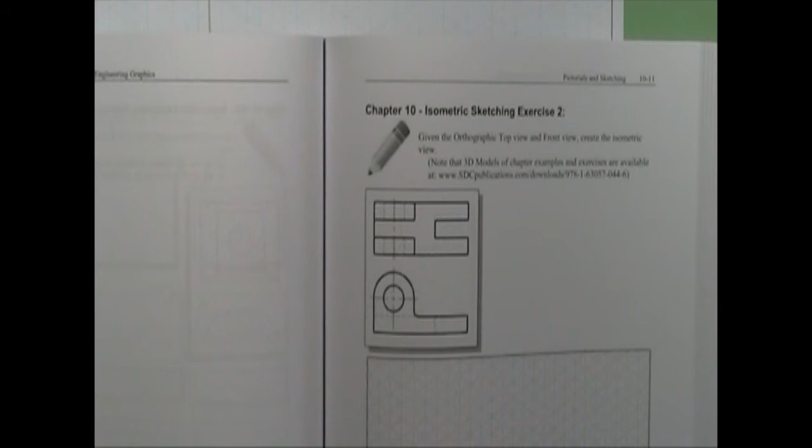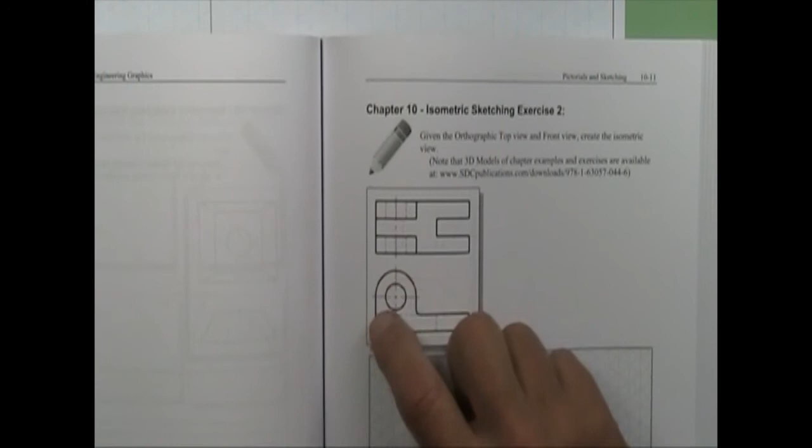This video is going to be on doing the isometric sketch exercise number 2, but I'm not going to do the whole thing. I'm just going to show you how to do the ellipses for the rounded ends down here. I've already got my box centered in my space, and you saw how to do that in the previous video. So I've got it figured. I've got it centered. I've got my box drawn.

The large arc, the big part, has a radius of 3. So I'll come down 1, 2, 3. That's going to be my center. And then I want to go ahead and draw that back across the top. All right, and then I'll go ahead and put in my diameter size of it also. So I come another 3, which gives me the 6 for the total width of the thing.

Okay, and now I want to come down 1, 2, 3. That's the center of the arc. Okay, the center point, and you've got a hole there. So if you remember drawing the rhombus, I come back, 1.5. Put my vertical line. 1.5 down. Draw the bottom. 1.5 up. And so I have a rhombus here for the hole, for the circle it goes through.

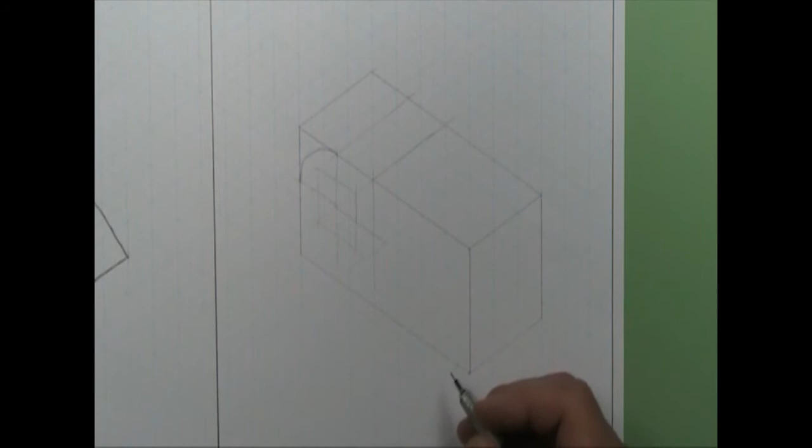Well, the top of this thing is an arc. It's half a circle. So I've already got a rhombus kind of drawn here. And my arc is going to go from here through the small angle up to this point. Much larger than what we had previously. So we kind of figure it in there. And then here in the large corner, we have a much larger radius arc. So we kind of pencil that in.

Now then, this thing is 2 squares back because it's kind of got a cut in it. So I want to come back 2 squares, and I can draw another rhombus and project these center points back. So you're going to have a lot of construction lines going on here. And I can come back 2 squares with my center. That'd be the center point right there.

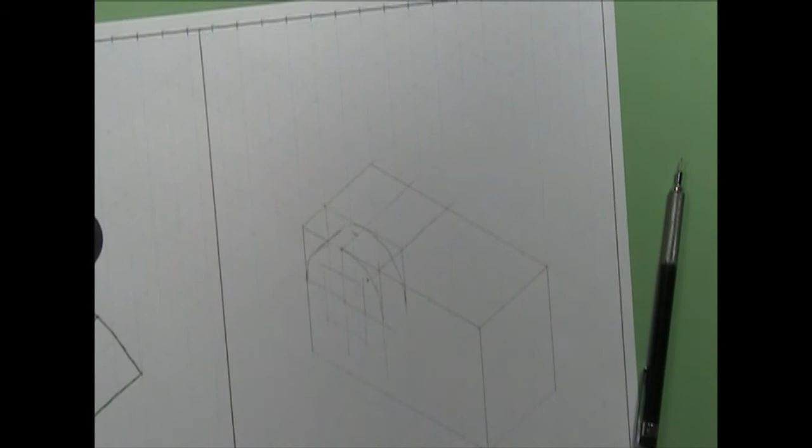Now then, in the corner here, where this arc comes down, it drops behind this one. And that should connect right here. And the way we deal with that is we connect these 2 arcs together with a tangent line, which is on the isometric plane. And then I would erase out the part that goes down. And I'll go ahead and darken this one so you can see it a little better. And then my straight line, that is the tangent there.

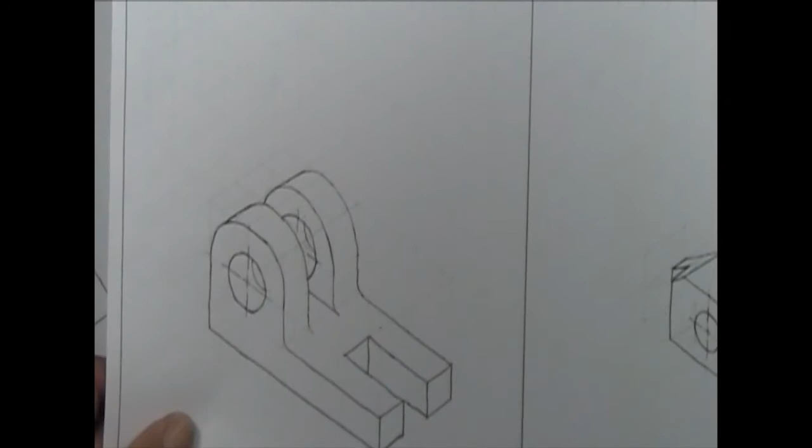Okay. All right, and so now you would duplicate that back here in the back. You can draw the back first and then draw the second side, but it's basically 2 squares back again. And so you would duplicate that back here. You'll also do your rhombus here, or your circle here, your isocircle. However, you can see the rear of that circle where it goes through in both instances. So you have to kind of project your ellipse back to the next plane going back.

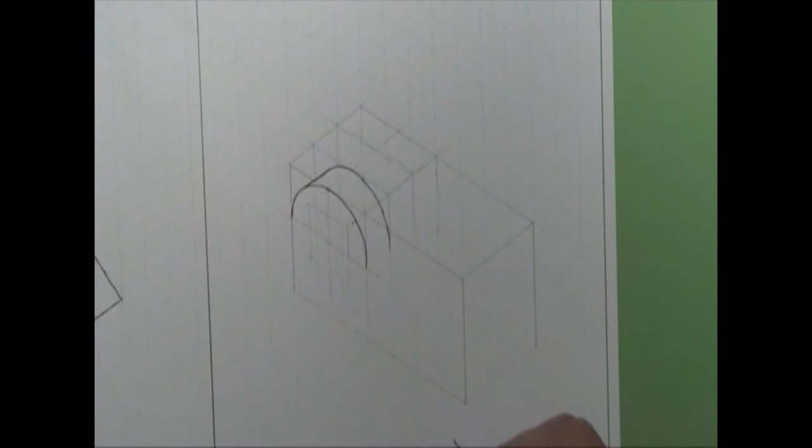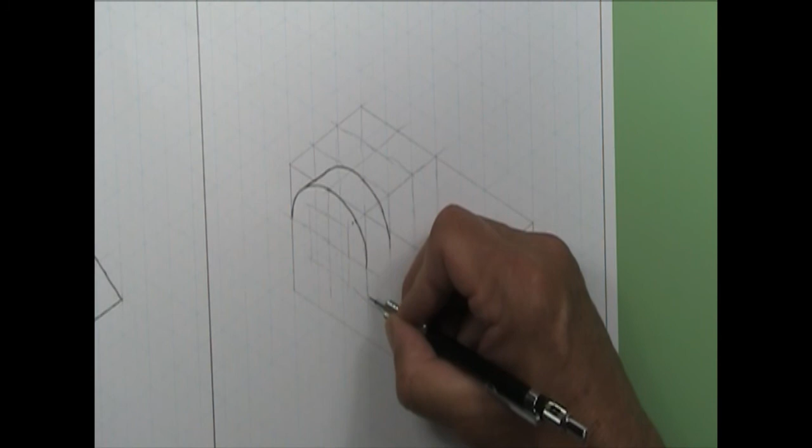And then as you can see, you have a fillet where these things join, where they come down. So this is 2 squares up. This comes straight down. And because that's an obtuse angle, it's going to be the large radius. And let's see, I'm using about half of a square for the radius. So it's going to be kind of small.

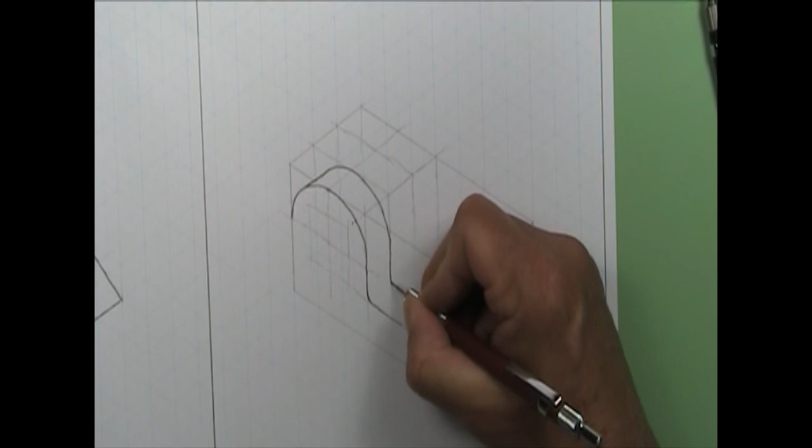Be like so. And then where it joins here, this would come down to, let's see, right there. And then you have the arc, and then the arc stops. Okay, there's no line coming on down from that. And so there's what your finished drawing should look like right there. Okay. If you got questions, ask me or the lab assistant.